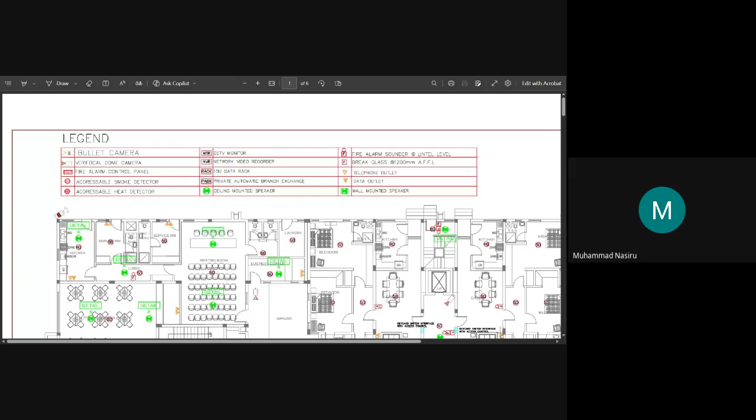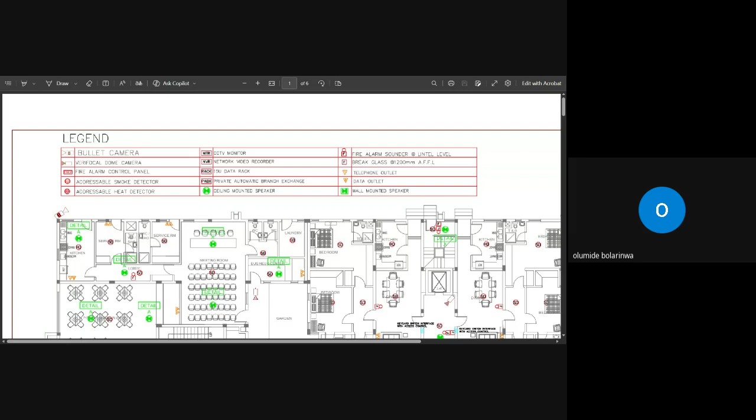Can you all see my screen? Yes, sir, we can see. Or should I send the drawing across? Yes, sir, preferably. Okay, let me send the drawing. Mr. Jamiu, I could not access my WhatsApp, but I've sent the drawing to your mail. It has gone. So you can just send it to the group and let everybody be on the same page. I'll do that, sir, right now. Okay, I'm waiting. So can we all see my screen now? Yes, sir, we can see your screen.

We have CCTV camera, we have the bullet, and we have the dome. Bullet is used for external, while our dome is used for internal. When we get to camera, we'll be explaining camera better. What we are focusing on is your smoke detector, your heat detector, your fire alarm sounder, your fire alarm break glass, and your fire alarm control panel. We are dealing with 4 things. And your rack now. Are you there?

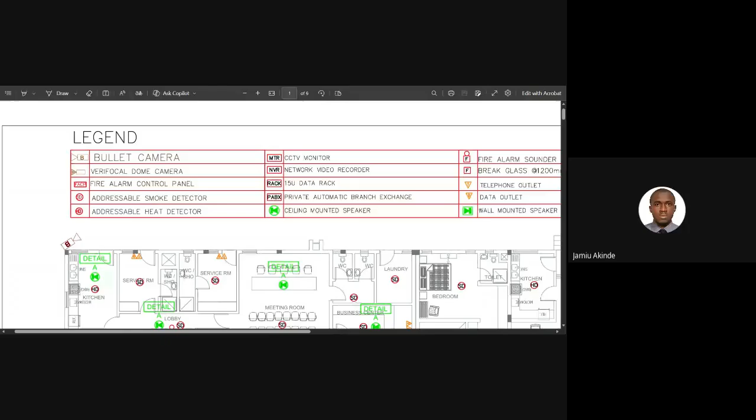Hello. Yes, sir. Now, do we have our drawing BESMM with us? BESMM4. Yes, sir. Can you open to the electrical part? I'm coming, sir. So Mr. Jamiu, have you sent the drawing to them? Yes, sir, I have. So we can open to page 1 now, please.

You can see the legend. The first thing you tend to do is study your legend. Sometimes your legends are not complete, but as a QS who has been measuring MEP, you will know what is missing. I should not lie, sometimes I will see something and think it's not complete, but I know what should be there. Now you can see that we have FACP, that's fire alarm control panel. We are grouping our measurement into 4 aspects: primary equipment, terminal, cable, and cable containment.

Now, if you are talking about your primary equipment, what do you understand by primary equipment? If they tell you primary equipment, what do you understand? So they are the components which make up the fire alarm system. Okay. Any other person?

Equipment according to the BESMM, so we should check BESMM for what you asked previously. It says primary equipment is defined as a plant or equipment from which a system originates. For example, your main switchboard, your control board. God bless you. If you are talking about your originator, it means without it, all of that component cannot function.

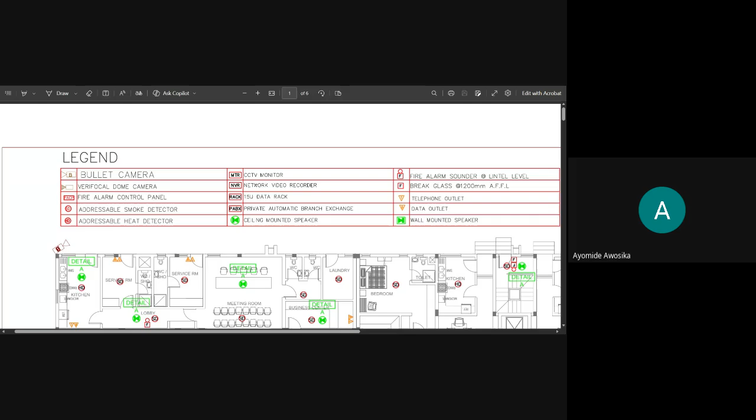We have fire alarm control panel, smoke detector, addressable heat detector. We have a fire alarm sounder, and we have what? Fire break glass. Which one is our primary equipment here? And which one are the secondary, which one are the terminal equipment? Please let's respond. I would say our terminal equipment could be like our outlets. And then our primary equipment, on this legend I mentioned. Which one is the primary equipment?

Fire alarm control panel. Without that fire alarm control panel, all other systems will never trigger. Are you there with me? Because without that fire alarm control panel, it will never work. Now, sometimes you might not even have a fire alarm control panel. We have conventional and we have addressable. Sometimes in some buildings we have smoke detector, heat detector, but never an FACP, that's fire alarm control panel.

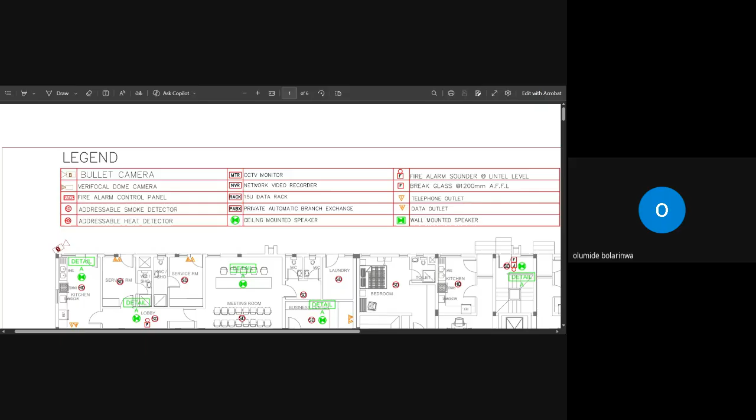Now, number one, we have our primary equipment. Our primary equipment in this case is our fire alarm control panel. Now, this fire alarm control panel lacks specification. I usually tell someone, when you are given a BOQ, the first thing you look at is what specification they are giving. They didn't give me the brand, but I know the brand they recommend as of today is Gent for fire alarm systems. So I'm using Gent. My fire alarm control panel is my primary equipment. And how many quantity am I having? Now, can we do one exercise?

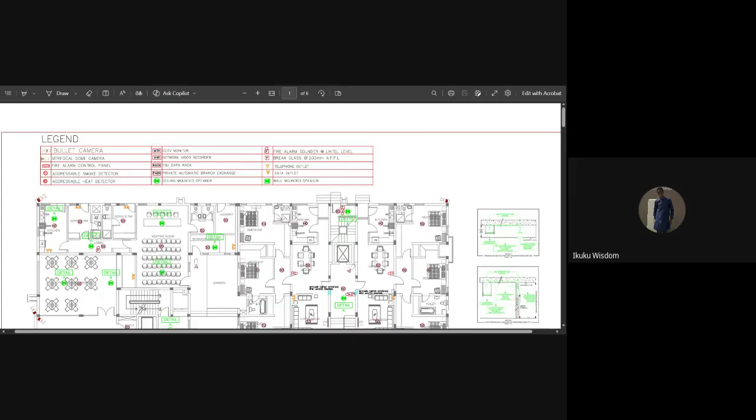Hello? Yes, sir. Can you? Can we all do one exercise within 10 minutes now? Yes, sir. Now, go to ground floor.

Are you here with me on this drawing? Go to ground floor. Count, indicate numbers of fire alarm system we have, FACP. Indicate the numbers of smoke detector we have. Indicate heat detector. Indicate fire alarm sounder and break glass in the next 5 minutes. Can we all do that?

Sorry, sir. Please, can you repeat the question? I said on this your first ground floor, count every item on this drawing. Both the camera. I want us to be fast in this case now. Count the numbers of external camera we have, internal camera we have. Count the numbers of fire alarm control panel, your CCTV monitor, everything on this ground floor. Let's do this exercise within 10 minutes.

Are you there? Can we do that in the next 10 minutes? Mr. Jamiu, can we do that in the next 10 minutes? Yes, sir. I want everybody to participate. Not that I'll be talking while some people will just understand. I want us to participate so that you can know that everybody is on this call and we are participating.

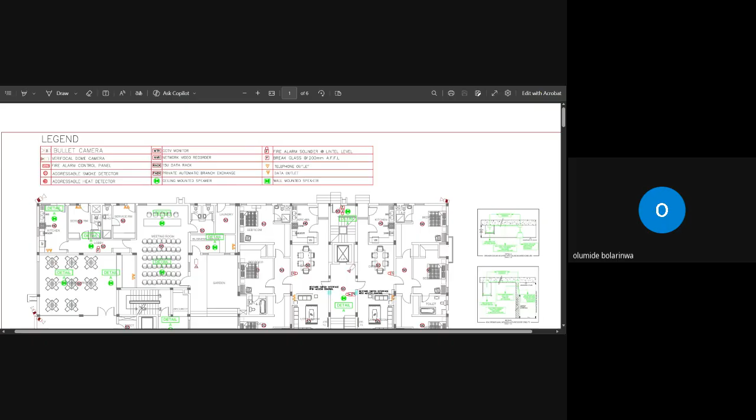Can anybody tell us how many terminal equipment do we have? List them, numbers, and the primary equipment also. Let's start from here. Can you give us under fire alarm system? What do you have?

Are you there? Hello. Hello. Okay. Hello. We are with you, sir. We are with you, sir.

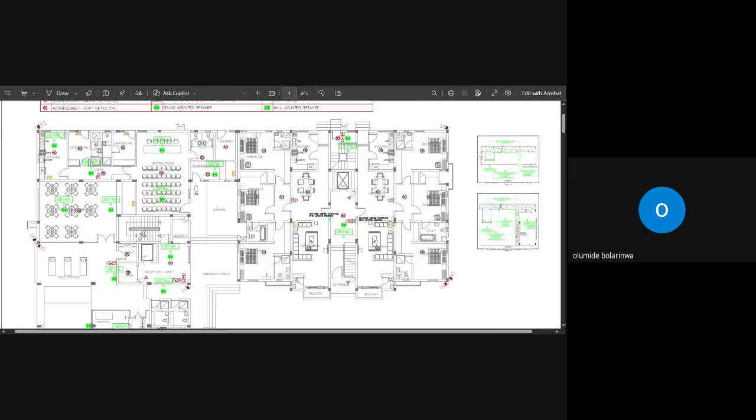Ladies first. Fire alarm. How many of these things do you have? And someone else will confirm it for us. How many fire alarm control panel do you have? Anybody? Numbers of smoke detector you have, numbers of heat detector you have, numbers of sounder, numbers of fire alarm break glass.

Ladies in the house, ladies first. Yes, good evening, Jemima. Sorry for that. No problem. So for fire alarm control panel, I counted one number. Fire alarm control panel, it's only one you can have in a building, except if the building has been separated. So we have one number. Are we noting it? Then addressable smoke detector 26.

Now, your fire alarm control panel is your what? Is it terminal or primary equipment? It is a primary equipment. Then we have terminal equipment. Number one. I'm listening, ma. Sorry, I don't know which one of them is terminal. The rest. The rest are terminal. Okay. So we have addressable smoke detector, 26 number.

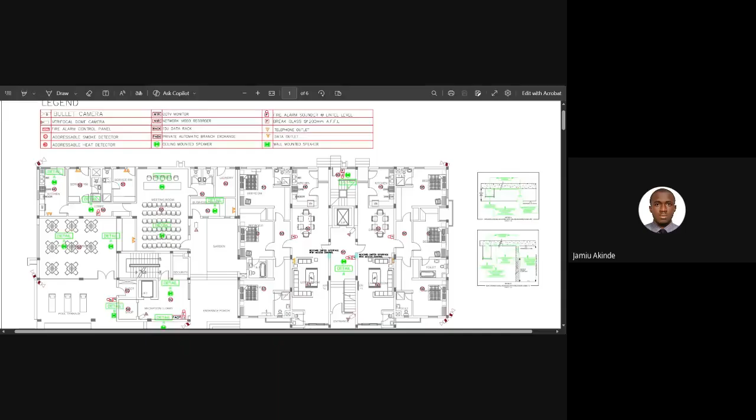Is she right? I counted 27. I counted 24. I also counted 27. Okay. 27. Continue, ma. Then we have addressable heat detector 3. Is she right? Yes, heat detector is 3. Fire alarm sounder 7. Is she right?

Then break glass 4. Is she right? Okay. Thank you so much, ma. You're welcome. So, any other counter opinion? Any other counter opinion?

Any other counter opinion? Nothing from my own end. I think the only counter opinion was the 26, and we all said 27. Okay, fine.

So now, do you all see my screen now? Yes, sir. We can see your screen. Okay, you can all see my screen now. I will try and send you the document of this drawing you are working upon. Let me see, maybe I can get it. Hold on for me.

Also, we might be treating the solar system under the electrical part also. We might be treating the solar system also in this case. So don't worry, I will try and send you the taking off. Now you can see my screen. What do you see on my screen? We have the primary equipment. Yes.

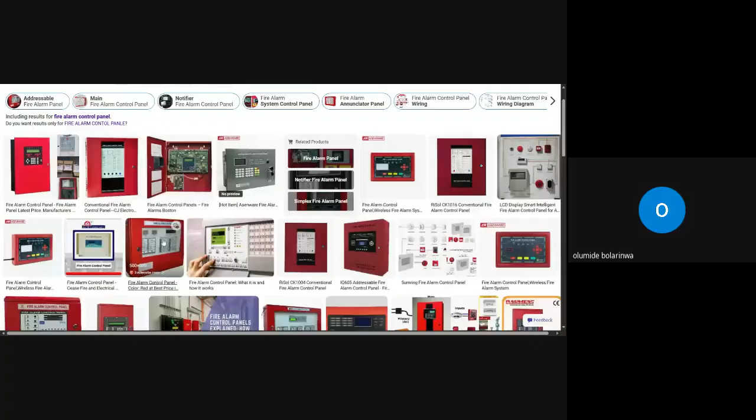Have you seen something like this before? Do you all see my screen? Hello, are you there? Yes, sir. We can see the screen. Have you seen something like this? No, sir. Okay, but something similar. So this is your fire alarm control panel. This panel controls all other terminal equipment in the building.

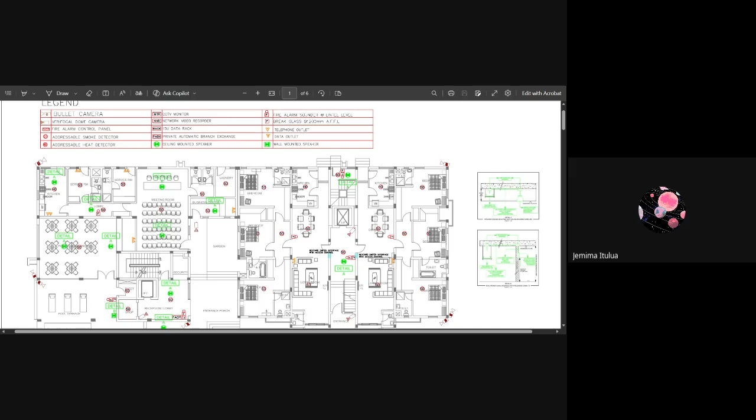So what was the next terminal or primary equipment do we have also? Network video recorder. Okay, so we have NVR. Do you know what they mean by NVR? NVR is just for storing, it's a storage device. And remember, we have different NVR - they come in different ports. We have 48 ports, 32 ports, 24 ports. So what's the next terminal or primary equipment now? Next one.

15U data rack. Data rack means after connecting everything, your NVR and your rack, you now put your NVR in your rack. All cables will be there.